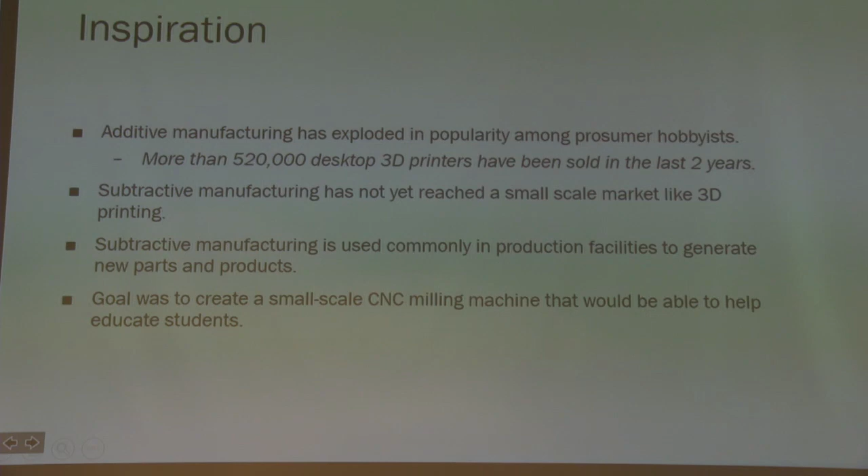What's interesting is subtractive manufacturing, like a lathe or a mill—turning, things like that. They haven't quite reached the small-scale market the same way. The cheapest comparable product we found, with capabilities similar to ours, was around $4,000. We've done a bit better than that, and the overall goal was to get this down to a level usable for consumers, or more importantly for educational use.

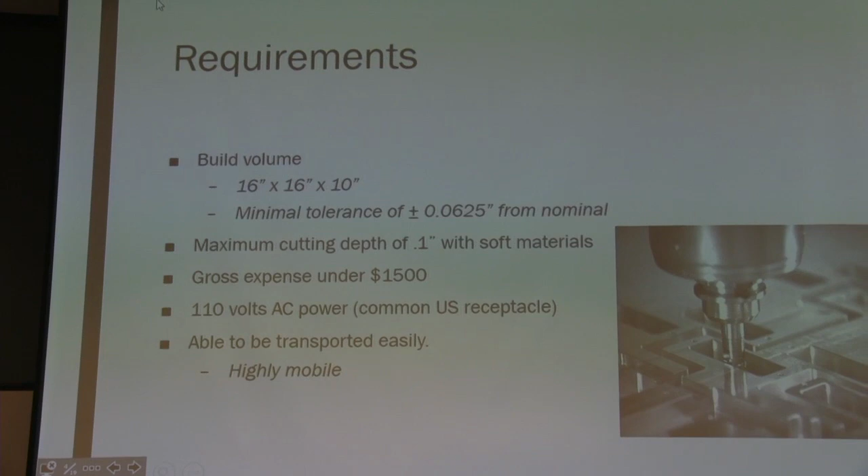To touch on the requirements we chose, from the beginning of last semester, these were our goals: we wanted a build volume of 16 inches by 16 inches by 10 inches deep, which is a pretty decent sized part for a mill this size. We wanted to maximize our tolerance at plus or minus a 16th of an inch, which isn't great for a production mill, but for an educational purpose would be sufficient for the calculations required in the classroom.

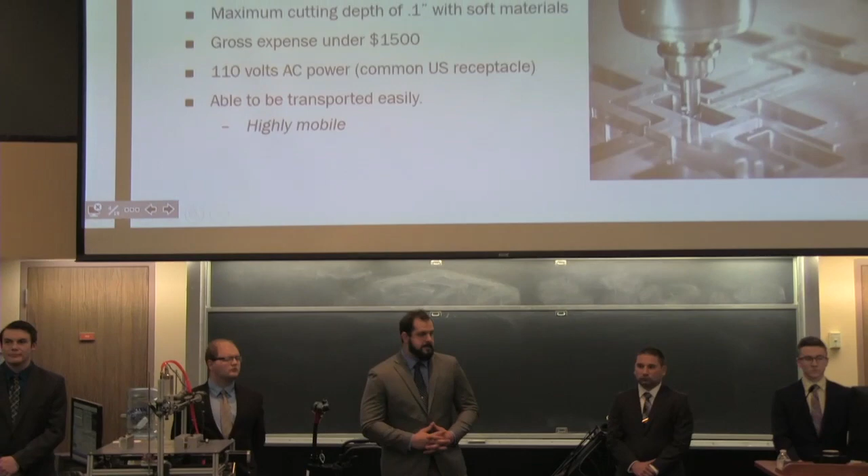We wanted to keep our gross expense at $1,500. As Joe just said, there are subtractive manufacturing products on the market, but they make much smaller parts and are much more expensive, so we wanted to improve on that. Lastly, we wanted to be able to move this mill around from classroom to classroom and plug into a 110 receptacle so it can be used anywhere in the building.

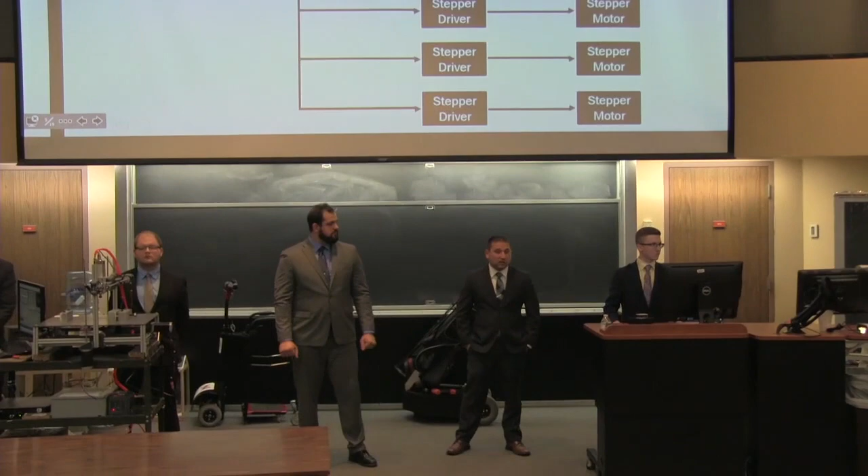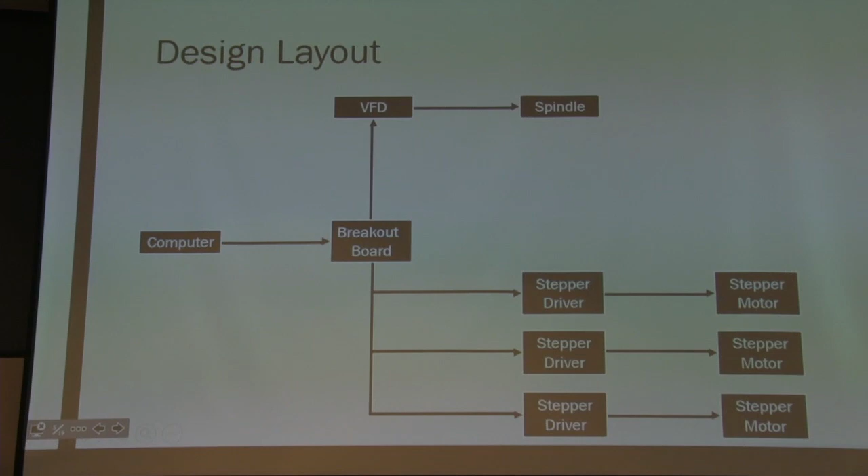Above is a very basic block diagram of our design layout for the CNC machine. It starts with a computer running our CAM and CAD software, which connects to a breakout board, then to our VFD, stepper drivers, and e-stop button. The VFD is connected to our spindle and controls the spindle speed, and the spindle holds the cutting tools which cut the part. The stepper drivers are programmable using dip switches—you can change the microstep values to improve tolerancing—and those are connected to the stepper motors.

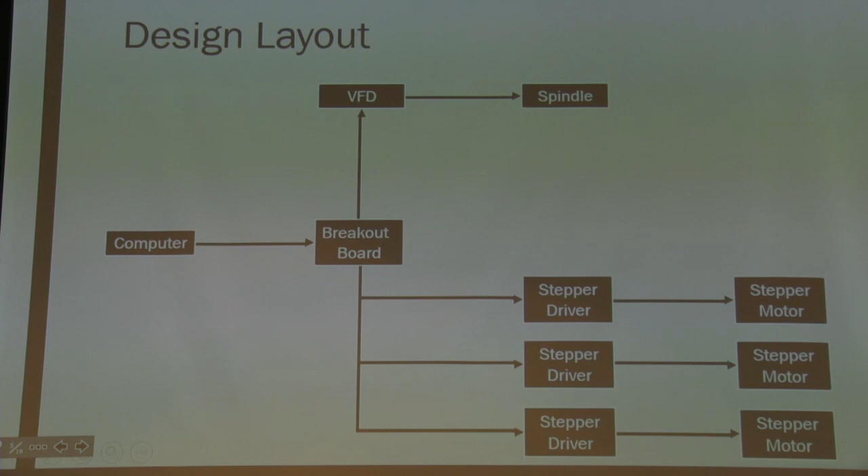As stated previously, the end goal of this project was to create a machine that gives students a first-hand look at the subtractive manufacturing process. This was done by creating a machine that can be easily transported into a classroom but is still durable and robust enough to machine harder materials such as aluminum.

In order to achieve this, we built the frame out of strong, lightweight T-slotted aluminum extrusion. This helped us easily mount parts to the frame to construct the entire build, and also allowed us to fine-tune these parts for a more accurate tolerance. Our build plate for the machine is a piece of quarter-inch steel plate.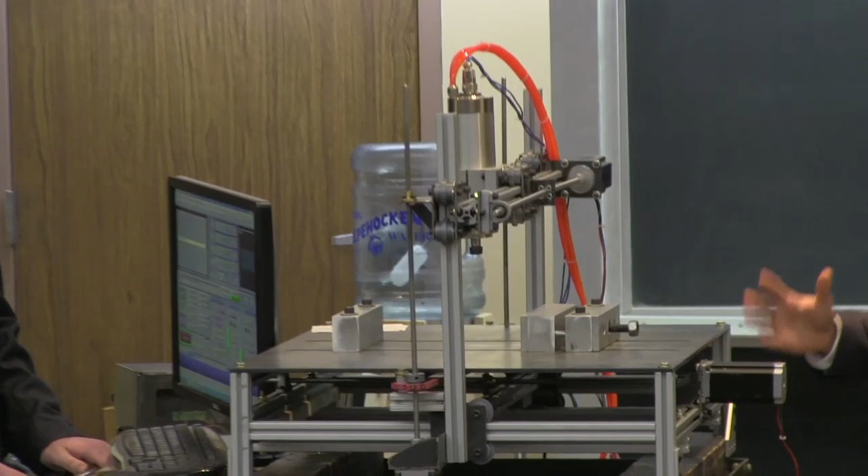And then we are going to demonstrate our machine next. Mike's going to turn it on in a second. It is going to be kind of loud. We're actually going to run the same G code that's running up there. We're not going to run it for too long because it is kind of loud. But also for this demonstration, we did increase the feed rate so you can see it moving much quicker than it actually did in that video.

I'll just wait till you can see it get messed up a little bit. Right there, it skips it.

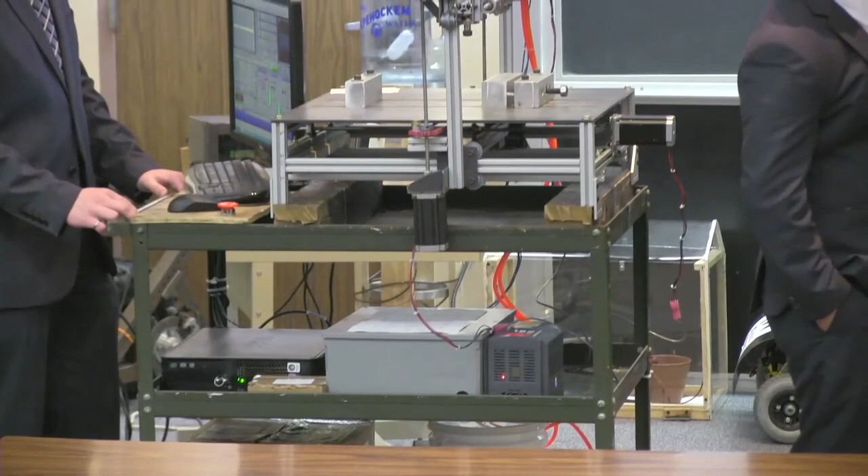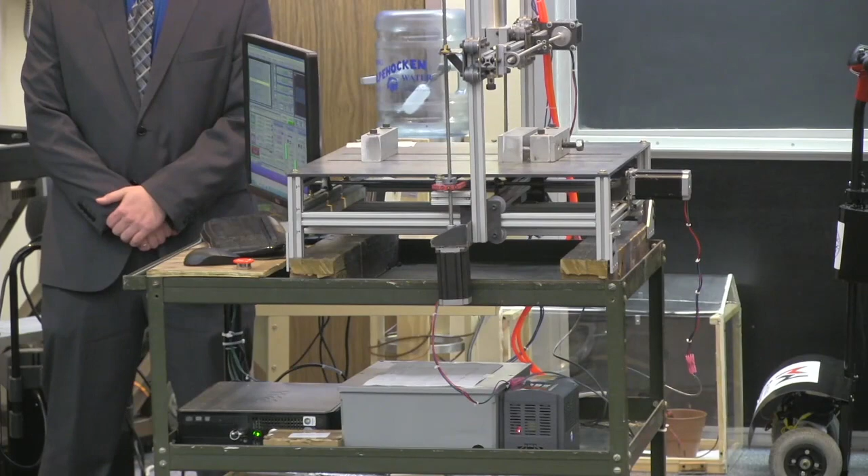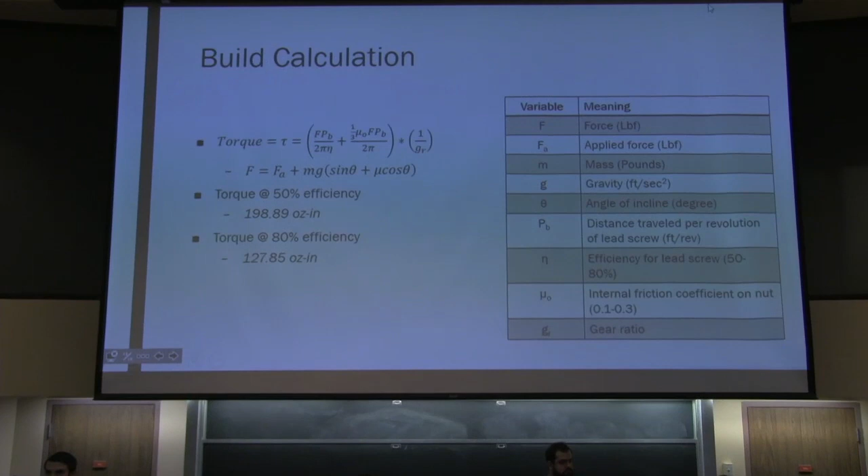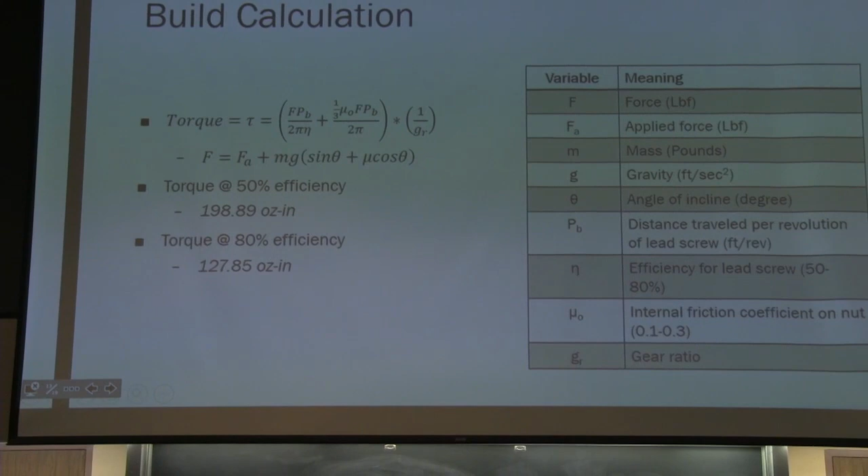Sure that the torque we were using for each of our lead screw systems from our stepper motors would be sufficient. So using the equation above and at various lead screw efficiencies, we found that at 50% efficiency, we need roughly 200 ounce inches, whereas at 80% efficiency, we'd only need around 130 ounce inches. Because of the assumptions we made with this equation, we wanted to make sure the stepper motors we had would work perfectly. So we got stepper motors rated about 425 ounce inches to make sure there'd be no issue at all with movement.

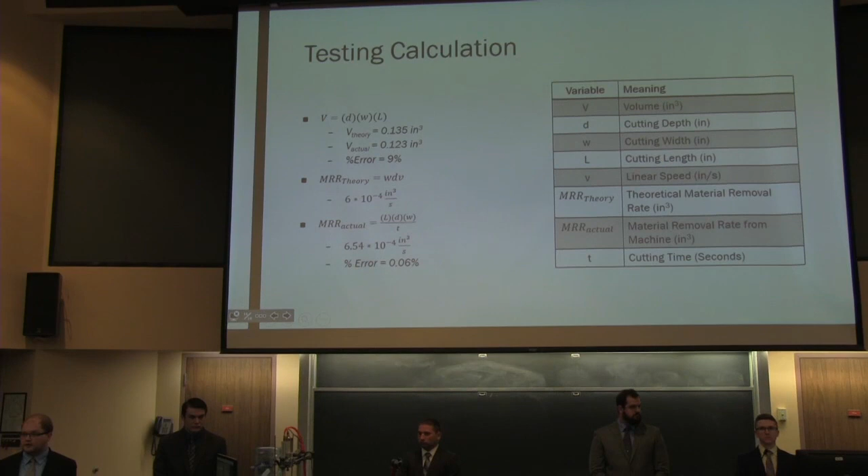In terms of testing our machine, we want this to be able to be used in educational environments such as the ME 215 class here, the Intro to Manufacturing Processes class. One of the things we go over in milling is the amount of material that's removed. So we looked at two different aspects in testing, on a 1 inch by 2.5 inches by 54 thousandths of an inch cut. It's going to cut out the entire box to test the amount of volume our machine should remove versus how much it actually removes, and testing just in one cut how much material is removed and the rate at which it's removed, to ensure that even if our machine has issues with binding that affect the overall volume, the material removed is still fine in one pass.

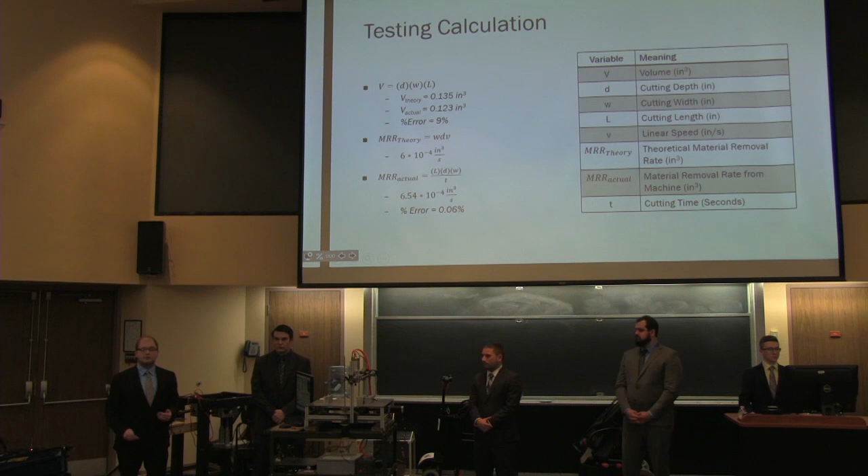So up above, we use that volume equation with the cutting depth, cutting width, and cutting length. Note that for the theory and the actual, they're not going to be the same values because of binding and tolerance. In the case of theory, the length would be 2.5 and the width would be 1 inch, whereas with our actual, we're about a 1/16 off, like we said we wanted with our tolerance, so the value is a little less. This results in a theory volume calculation of 0.135 cubic inches, whereas our actual is 0.123 cubic inches, resulting in a percentage error of 9.

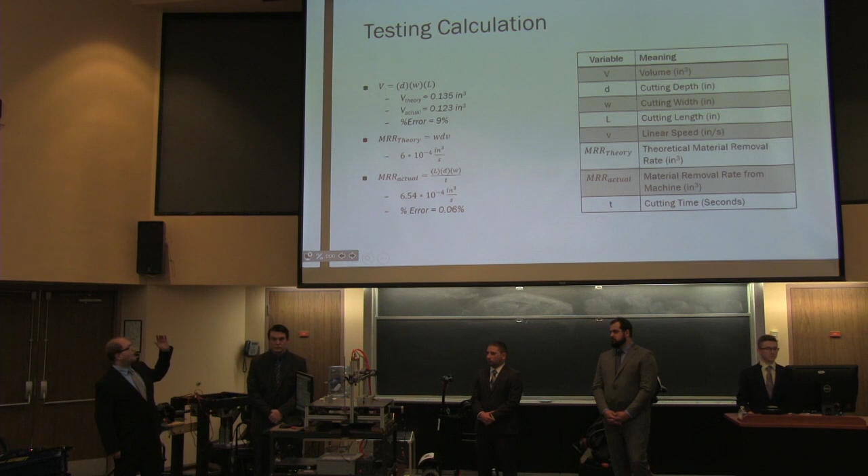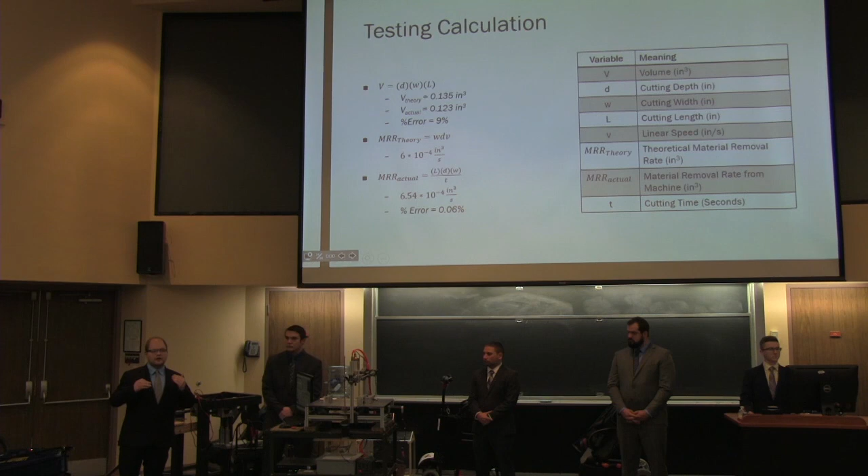For our MRR, because we were focusing on our material removal rate, which is how much is removed per pass, we didn't want to focus on the overall cutting rate, because if you take the volume and divide it by your cutting time, you're going to get around the same percentage error. We wanted to make sure that in one pass there's a low enough percentage error so it can make one good cut, but as it goes through the entire process, the binding is what causes the larger error overall. From this, we got a theory of 6 times 10 to the negative 4th cubic inches per second, whereas our actual is 6.54 times 10 to the negative 4th cubic inches per second, resulting in a small percentage error.

But as I said, when you actually run it through the entire process, all that binding adds up, and you get a much larger percentage error with your volume in the end.

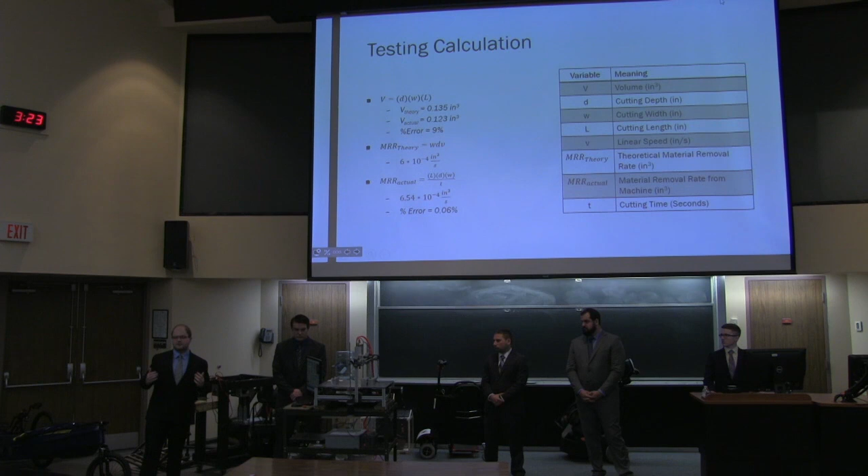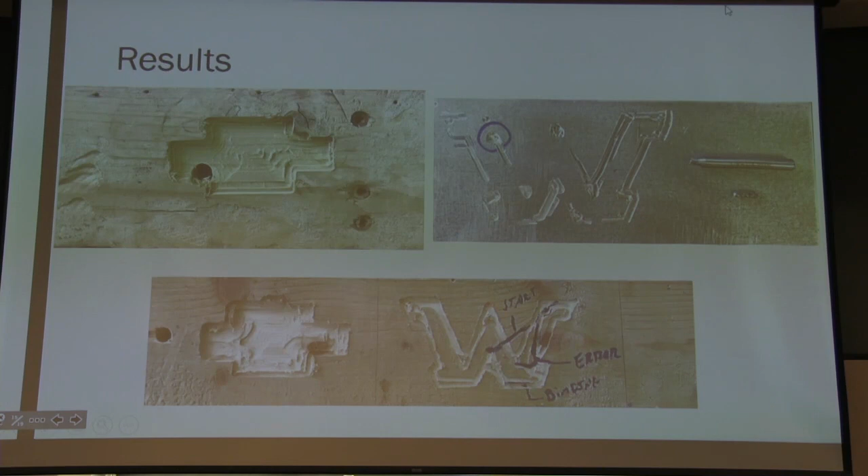As you can see below, we also tried the Flying W. Again, our speeds and feeds were still not very accurate with the wood Flying W.

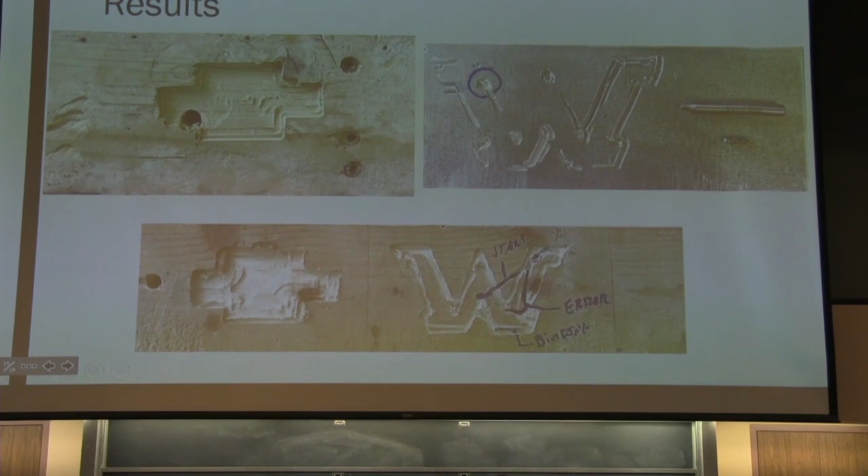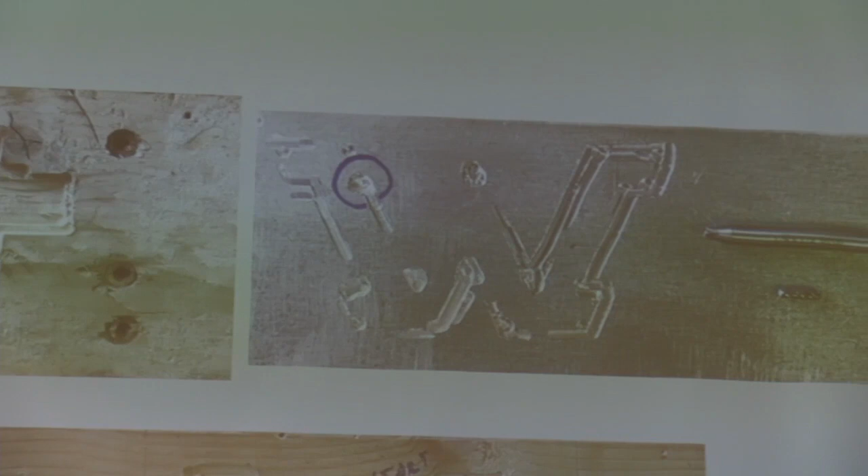We even highlighted where some of the errors were, where it crossed over and cut a little bit too hard. Interestingly, on the top right, as I said, we were trying to get our speeds and feeds right before we got to aluminum, and based on the circled blue error section, we actually did break that tool, which we have if anybody would like to see it. We broke one of the flutes off and snapped it in half. Since then, we have gotten better.

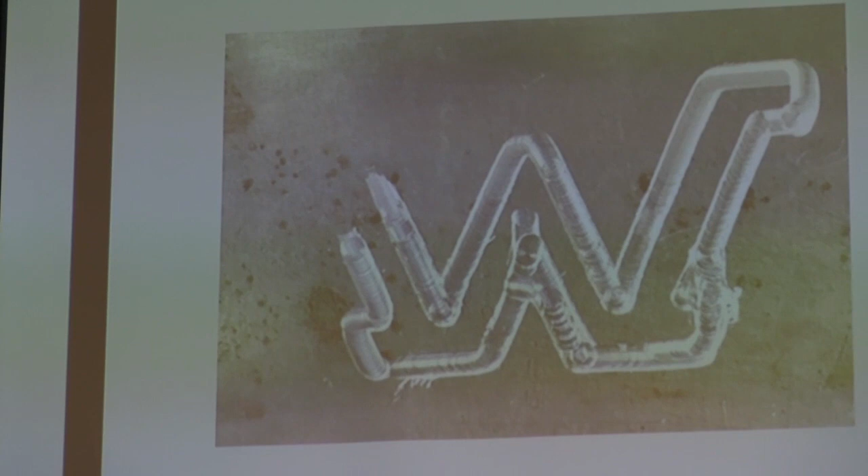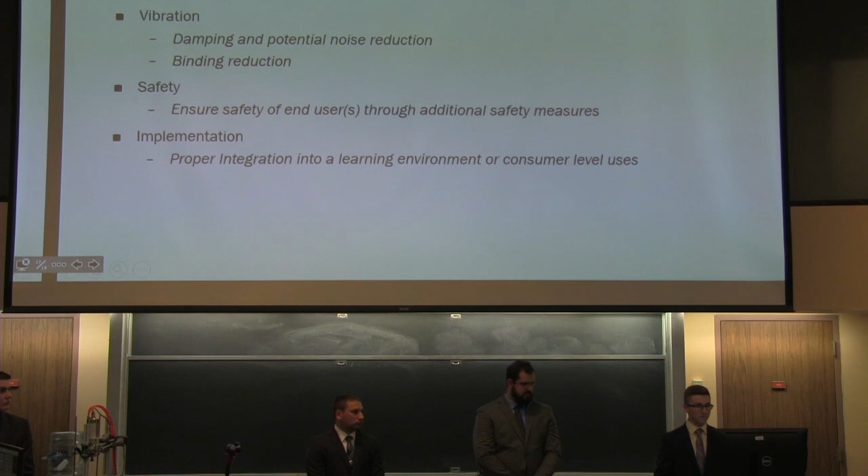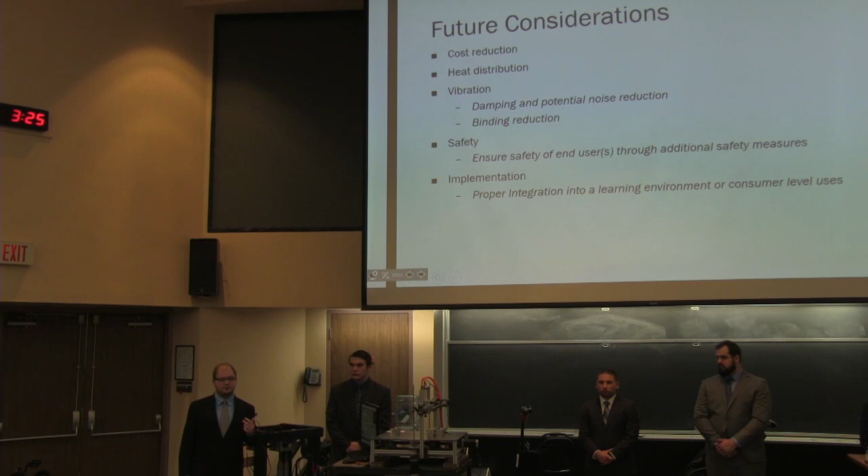So future considerations for this project: one of our biggest ones is cost reduction. We wanted to make building this machine as affordable as possible, but we ran into some unforeseeable issues. We are aware of those issues now, so for future models it wouldn't cost nearly as much as the result of this one did.

Another issue is heat distribution. We have a low feed rate, resulting in a long milling time, but also a lot of heat building up. That heat can warp the cutting part and affect the tolerance, and it can also greatly affect the cutting tool when it's destroyed. So one solution would be to apply cooling to the part to ensure the heat remains at a minimum.

Another issue would be with vibration and damping. The chatter, as you can see with the parts passed around and with the calculations, greatly affected our effectiveness of cutting with the tolerance. We have linear guide rails, but they aren't the proper ones we would like. We'd like to implement more effective ones to ensure that binding is at a minimum.

Another issue would be safety. While we have the protective covering, which is over there, in order to get the chips off you have to either brush them or completely lift off the covering and use compressed air. We'd like there to be a compartment that you can open up and then blow the chips off with compressed air.

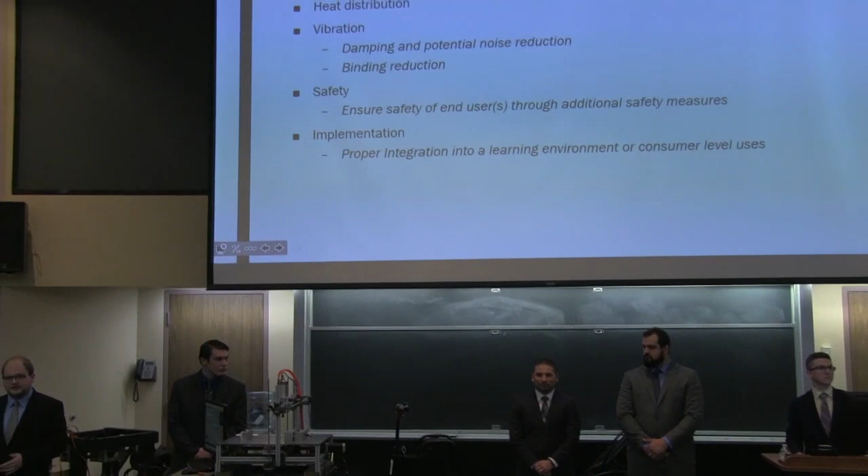Our final issue is mainly just implementation, with the chattering issues and all the other combined issues we still need to deal with. While you could use this in a classroom to demonstrate the milling process, we don't want it just for demonstration. We want it to be that anyone can take this machine and use it as a milling machine in their garage.